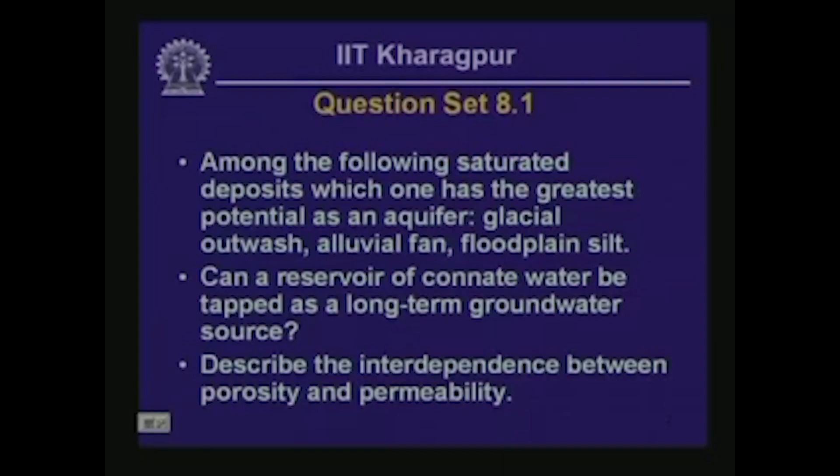Okay, so that takes care of the question set of the previous lesson. Now we move on with today's subject matter. What we want to learn in this lesson: we would like to be able to list the objectives and procedures for groundwater investigation.

We would like to be able to list the factors that influence groundwater flow through soil and rock, estimate permeability for simple subsurface conditions from laboratory and field tests, and finally, we would like to be able to estimate, for very simple subsurface conditions, what is the volume of groundwater flow that is likely to take place.

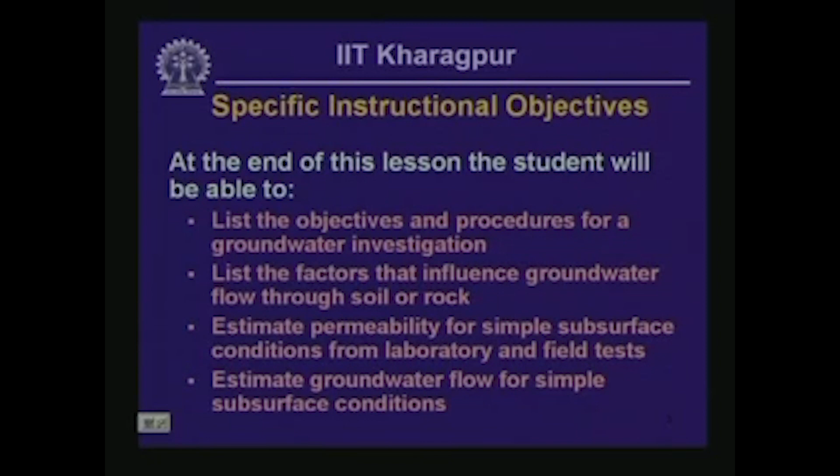First, we look at the typical procedures and objectives for groundwater investigation. In order to assess groundwater potential, the first step is to carry out a groundwater investigation, which should ideally give us some idea about the safe yield of an aquifer. To do that, we need investigation of the subsurface groundwater condition, and we also need some handle on the meteorological aspects or weather pattern prevalent in the particular region of interest.

The second purpose is to identify groundwater related engineering problems. We are going to look later at some of these problems that often need to be handled by engineering geologists.

We also need to identify groundwater chemistry issues, in other words whether the groundwater is suitable for a particular use, such as drinking water, irrigation water, or construction water supply. So we need to identify the potentially harmful chemical constituents in groundwater sources depending on the intended use.

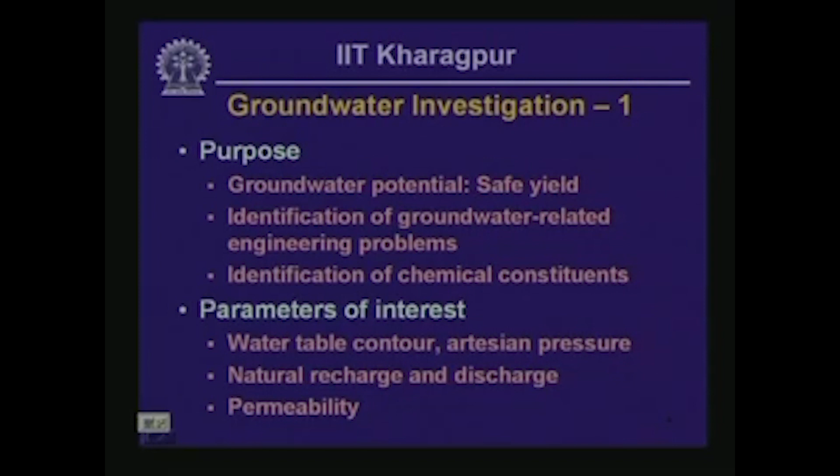Continuing with groundwater investigation, one of the procedures involves groundwater prospecting. What we attempt to do here is identify a source of groundwater. Typically, resistivity survey is a very common procedure for identifying a potential source of groundwater or a zone of saturated soil underneath the ground surface.

We have looked at the main features or essential details of resistivity survey in one of our earlier lessons on subsurface exploration, so I am not going to go into the detail of this particular procedure again.

Another type of investigation carried out is called groundwater survey, which involves installation of monitoring wells, drawing water samples for assessing groundwater chemistry from the monitoring wells, and long term monitoring to assess seasonal fluctuations in groundwater level or artesian pressures within these wells.

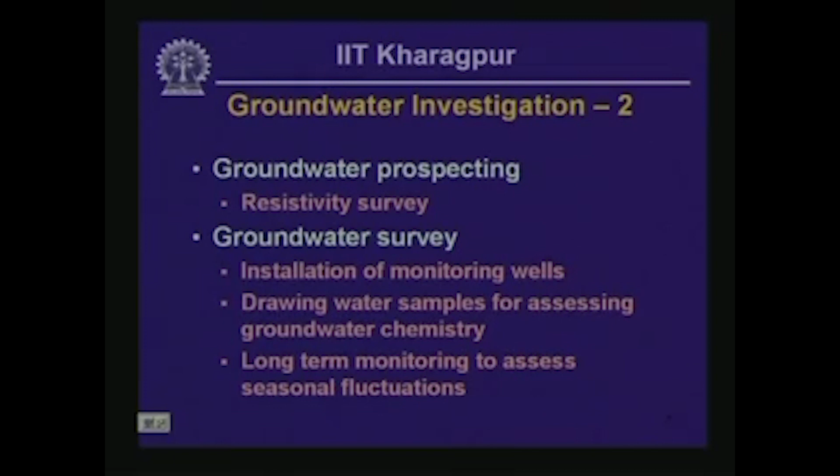What is also done in addition for groundwater survey is to pump out the wells at steady state in order to assess the potential yield from a particular well, and that is called well testing. So all these steps are carried out in groundwater survey and groundwater prospecting.

So you might ask, what is a monitoring well used in groundwater survey? A typical cross section of a monitoring well is shown in this sketch. It is essentially a casing tube installed within a pre-bored hole drilled or excavated within the ground, with the casing shown at the center of the hole, and a backfill around the casing. Let us go from the top.

At the top end of the casing you can see a cap, and there are two vents on the left side of this sketch. These vents are provided to give vent to any gases that might be present in groundwater.

The well casing is protected by installing a protective cover, usually a lockable protective cover, encased within a concrete backfill at the top. This is a concrete encasement in order to hold the protective casing.

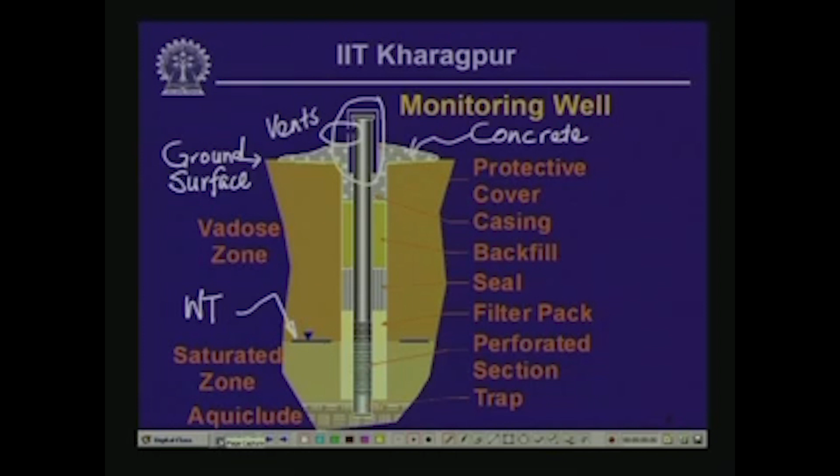What we also have shown here is that the casing tube in this particular case penetrates the entire depth of the saturated zone, and it is encased within an underlying aquiclude near the bottom of the tube there. So that in a nutshell is a very simply constructed monitoring well that is normally used in groundwater survey.

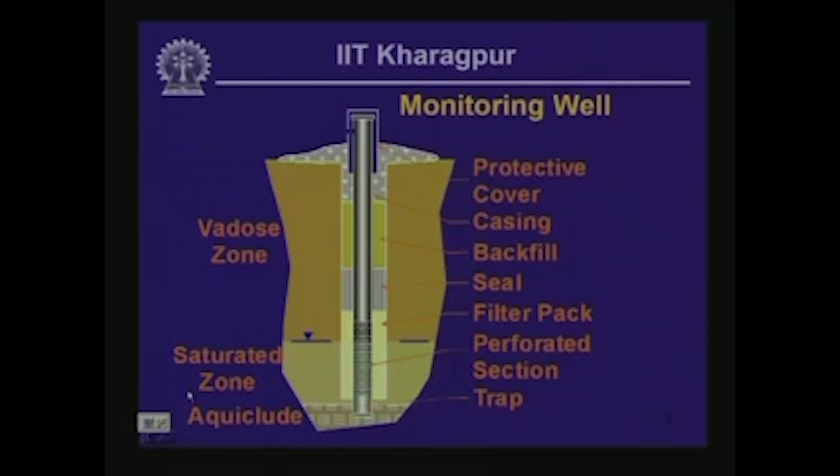So then we would like to know what are the causes or driving factors that trigger groundwater flow. First of all, flow is caused by head loss, and the ratio of head loss to the length of the flow path is called the hydraulic gradient.

Simply stated, what is meant here is that if the water table exists at a higher elevation at some location within the general geographic region you are interested in, in comparison with another location where the groundwater table is at a lower elevation, then usually the groundwater is going to move from the location where the water table is higher to the location where it is lower, because that is how water is going to flow.

We have already stated in the previous lesson that groundwater is that portion of soil moisture which is free flowing, or which can be mobilized by the action of gravity. So it is going to move from a location of higher potential energy to a location of lower potential energy, and the elevation of the water table is a measure of the potential energy of an unconfined aquifer. So water is going to move from a location where the water table is at a greater elevation to a location where it is at a lower elevation.

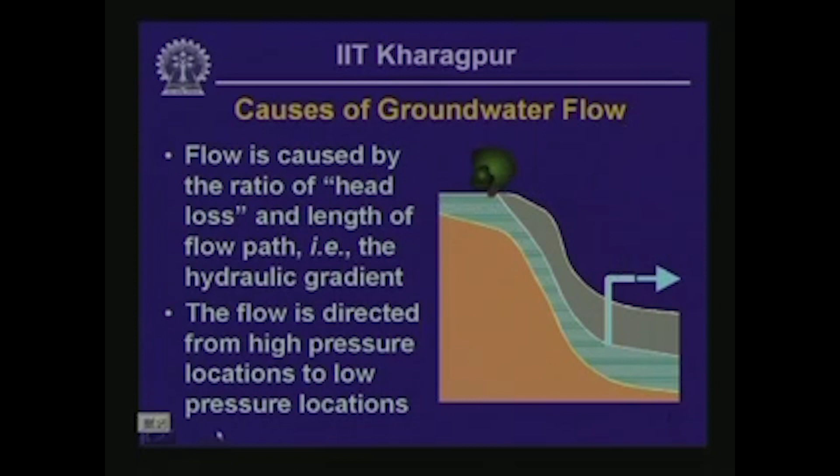The flow is going to take place between the recharge zone, which is towards the top left of this particular sketch, towards the artesian well, and the outflow direction is shown by the thick arrow near the outlet of the artesian well in the sketch. So H and L are explained already.

We have already looked at what is the driving mechanism of groundwater flow. Groundwater flow is driven by the hydraulic gradient essentially. Hydraulic gradient is the ratio of the head loss between the inlet and the outlet divided by the length of the flow path, and that is going to drive the groundwater flow.

Now the question comes, what are the factors that are going to inhibit or discourage the movement of groundwater flow? We know some of these concepts already from the previous lesson. Inhibitors of groundwater flow include, first of all, capillary tension. We need to have relatively large void space in order to get a reasonably good groundwater flow, as we have already discussed.

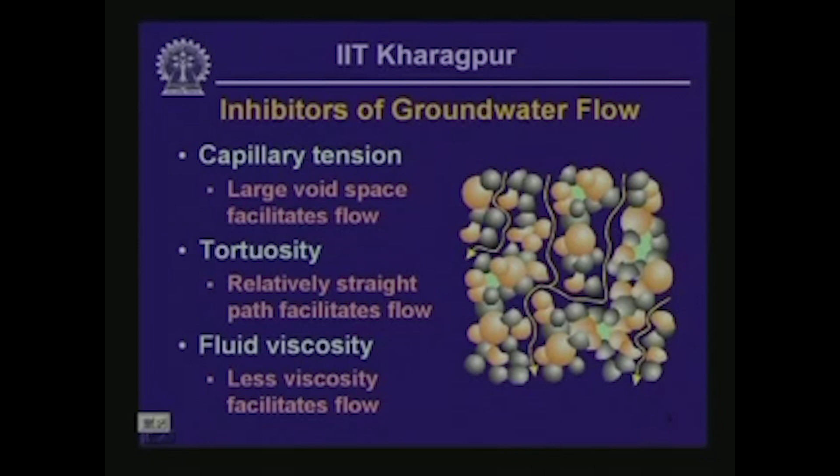The third inhibitor of groundwater flow is fluid viscosity. If you have got less viscous pore fluid, that is going to flow through the interconnected interstitial void space within the subsurface formation relatively easily in comparison with another fluid that has got a much larger viscosity. So these are the factors that inhibit groundwater movement.

Now we need to formalize the concept a little bit. Darcy's law is the law that governs groundwater flow, and what it states is that apparent velocity V is proportional to the hydraulic gradient. In other words, V is equal to a constant of proportionality times the hydraulic gradient, and this constant of proportionality is called the coefficient of permeability or hydraulic conductivity, which is a measure of the factors that inhibit groundwater flow through a subsurface formation.

What we need to stress here is that V, the quantity V, is not the actual velocity, rather it is the apparent velocity, defined as the volume of water flowing through a unit cross sectional area of the aquifer, and that is going to be different from the actual velocity.

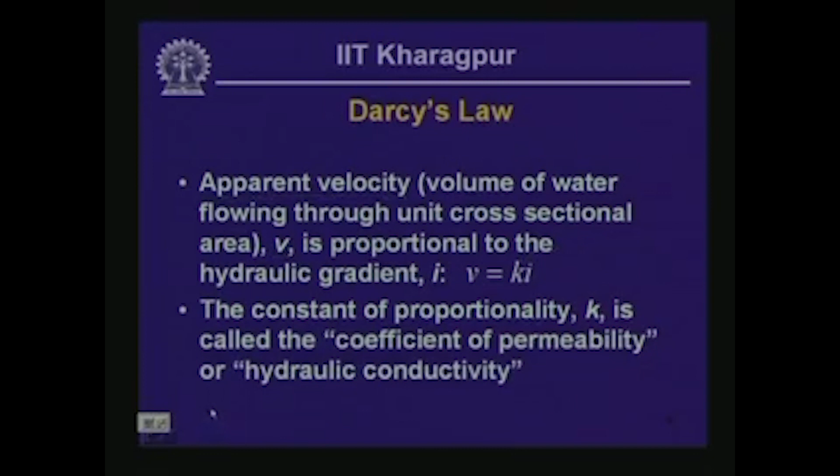Factors affecting permeability. We know some of these things already, as indicated in the previous slide: the constant of proportionality, or the coefficient of permeability, or hydraulic conductivity. We are going to use the term permeability in this lesson, but you need to understand that the coefficient of permeability is in fact interchangeable with hydraulic conductivity.

In the previous lesson we mentioned that permeability is a measure of those factors that inhibit groundwater flow. So what are the factors that inhibit groundwater flow? Those same factors are also going to affect permeability in the long run. So what are those factors?

First of all, grain size is an important factor. We have already seen that if you have a uniformly graded subsurface formation, then you are going to have relatively easy groundwater movement through the formation, so the permeability is going to be relatively high.

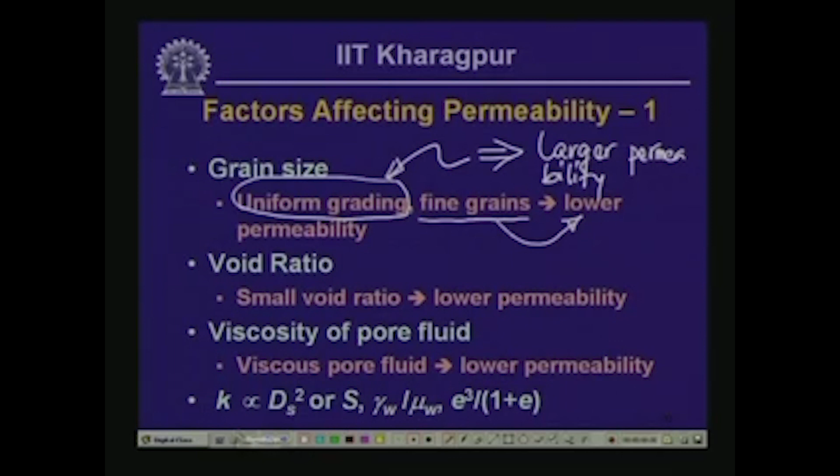Some more factors that affect permeability: saturation ratio is another factor, and permeability decreases remarkably as the formation loses saturation, because the pore space becomes occupied by non-interconnected volumes of water, which are relatively difficult to mobilize through the interstitial void space. As a result, permeability goes down drastically as the formation becomes partially saturated compared with a completely saturated formation of identical characteristics.

Second aspect to consider is the existence of imperfections such as bedding planes, fractures and joint sets. Cross-bedding permeability is usually smaller by almost an order of magnitude in many cases. Fractures and joint sets are more permeable in comparison with the rock between them, and this affects the distribution of permeability. Both these aspects lead to the development of anisotropic permeability behavior - anisotropy.

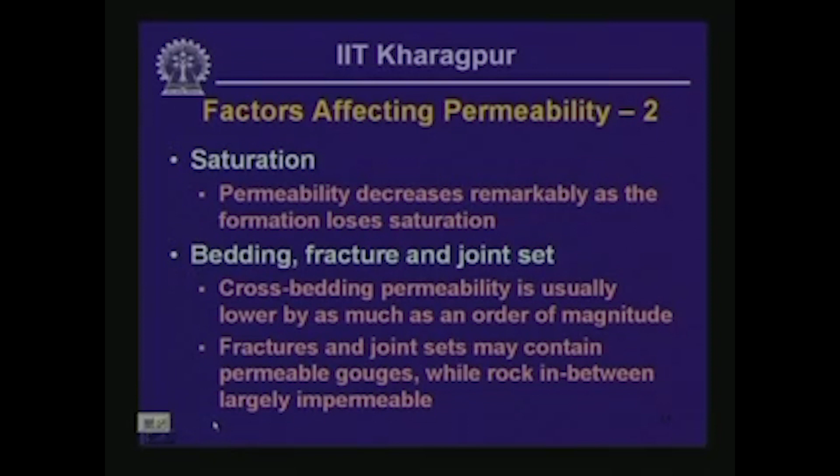You also need to consider time dependent changes in permeability. In Darcy's law, permeability was treated as a constant. Recall that V, the apparent velocity, is given by permeability times the hydraulic gradient, and we considered K a constant in that case, but in fact K might actually change with time because of several different reasons, mechanical or chemical, as we are going to see next.

What could happen with time over which groundwater flows through a particular aquifer? Clogging may take place, or opening of pore spaces may take place. These are two opposite effects. If pore spaces get clogged because of migration of solids or chemical precipitation, permeability decreases over time. On the other hand, if pore space becomes larger, permeability increases over time, and this can also happen in case of hydrofracturing.

We looked at the details of hydrofracturing briefly some time back in one of the earlier lessons regarding in situ stress within a subsurface formation. So if hydrofracturing gets triggered within a formation, permeability is going to increase for that particular formation.

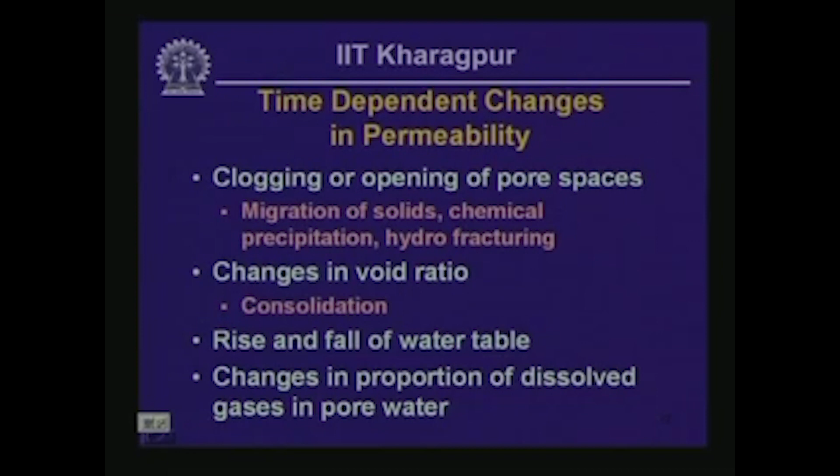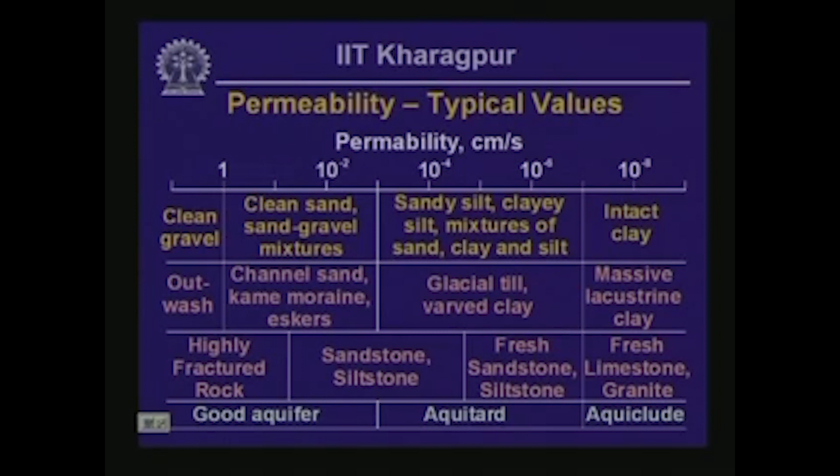It is called the constant head laboratory permeability test. A soil or rock sample is placed under constant head difference. At the bottom end of the cylindrical sample, you have a lower head elevation, lower groundwater pressure corresponding to the tailwater elevation. At the other end of the sample, we have a much higher elevation, and the difference between these elevations triggers groundwater flow, and that difference is H.

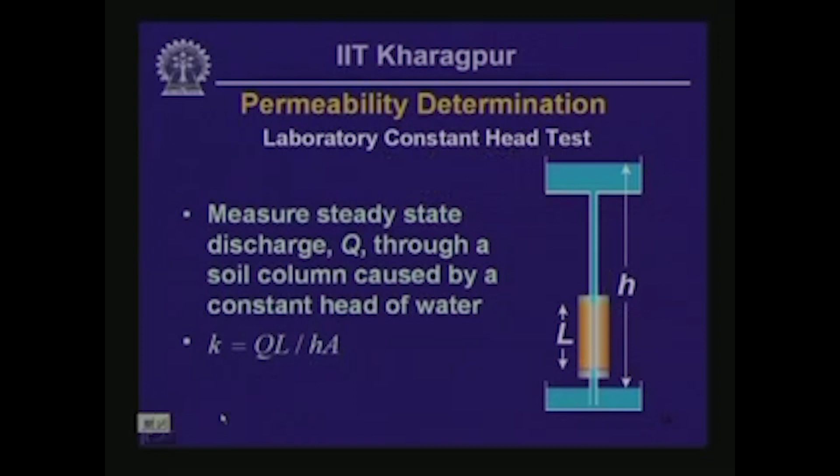Now let us look at the animation of the experimental procedure. First we place the cylindrical specimen in that particular configuration shown on the right, and then we let the water table drop to a smaller elevation.

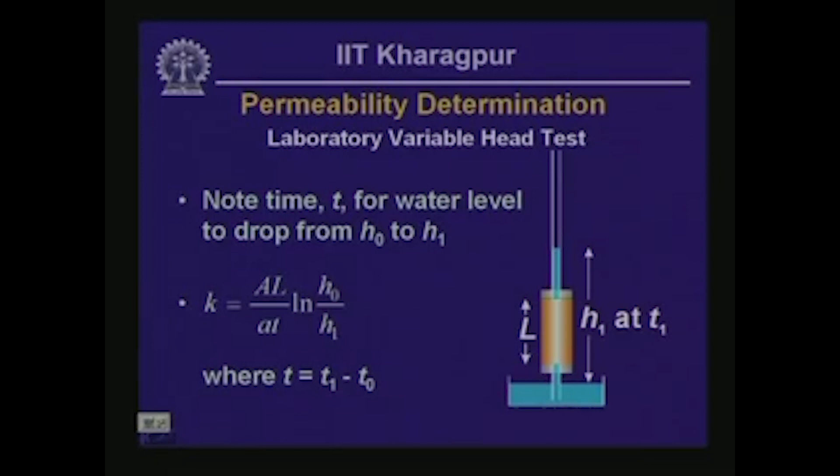We find the time difference between these two elevations, between the time difference between when the water within the standpipe at the top end of the cylinder was at H naught and that at the height of water of H1, and from these data we can calculate the permeability using the expression given on the bottom left of this slide.

Laboratory methods are not representative in many cases of the general nature of a large mass of aquifer that might be encountered in the field. So many engineering geologists prefer field variable head tests as opposed to laboratory tests.

Here, what we first do is bail out the water from within the casing tube, so that the elevation of the water level within the tube goes down to a depth of H naught below the existing water table, and then the water table is allowed to rise to another depth.

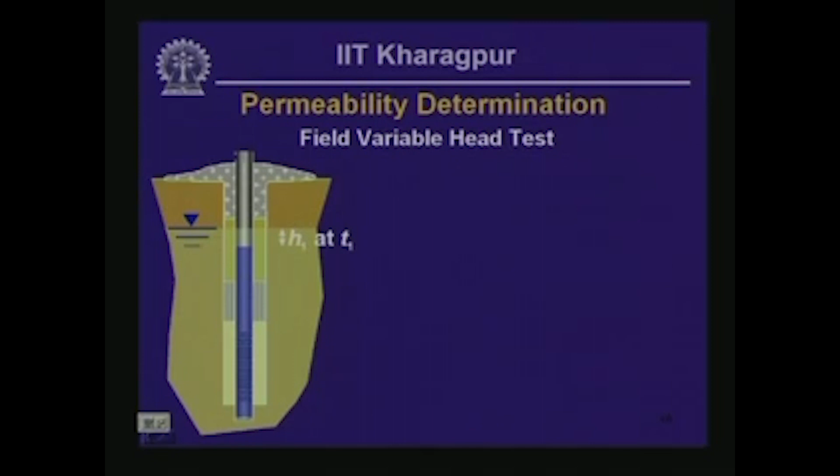Now, this particular equation represents an aquifer which is unconfined and extends to a great depth below the water table.

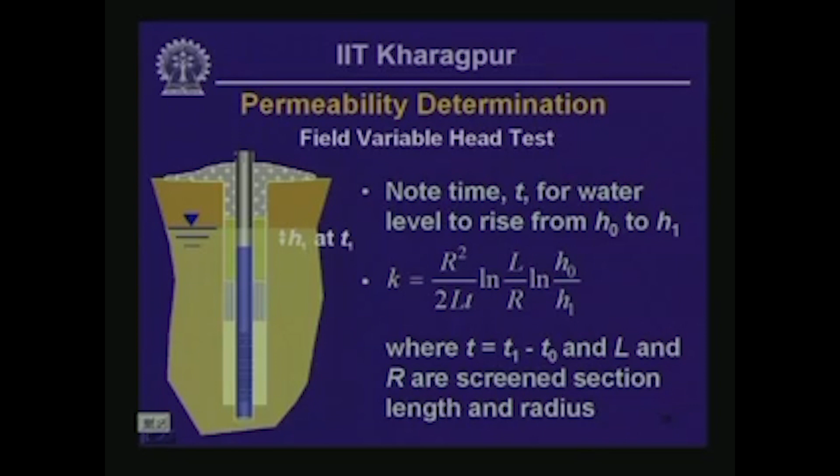What you should try to find from this configuration is the amount of water that is going to flow into the drain, or in other words, how much flow the interceptor drain needs to be designed for.

Now you try to answer this particular question in your leisure time, and we are going to look at this calculation when we meet for the next presentation next time around.

We are going to continue our discussion on groundwater flow in this lesson as well, and we are going to begin with the example or question or problem that I asked near the end of the last lesson. We are going to try to find out the solution for this one.

Now, this was the problem here, that we have got a road cut basically which intercepts an unconfined aquifer within a sandstone bedrock. The underlying intact granite is relatively impervious.

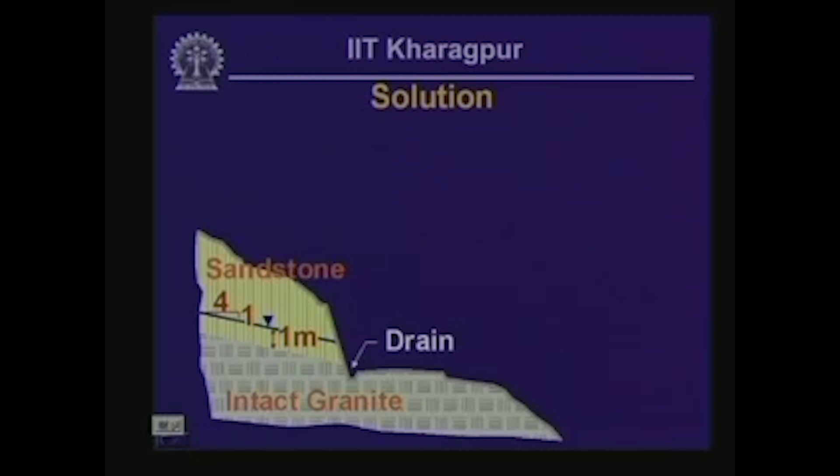So the question that I asked was how much flow will be intercepted by the drain that runs parallel along the left edge of the highway shown on the cross section in the sketch there. And the statement of the problem was like this.

The permeability of the sandstone aquifer was 10 to the minus 4 centimeter per second, and what I asked was for you to find the design discharge for the interceptor drain. Okay, now let's get on with the solution first.

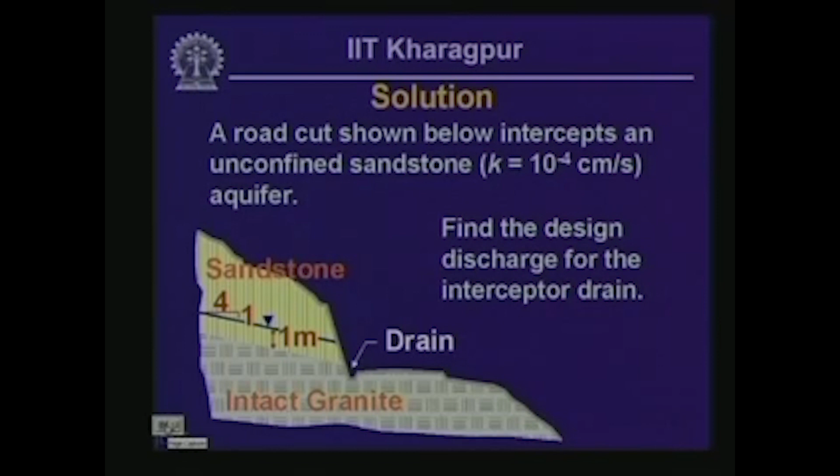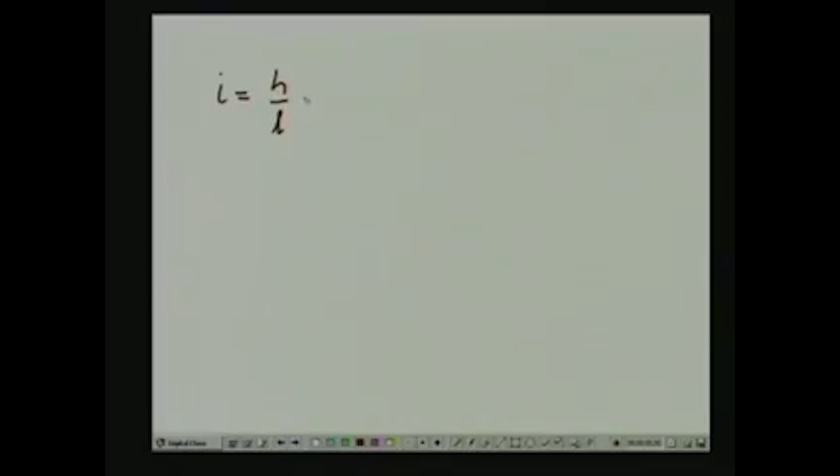In this particular configuration, what we have is the hydraulic gradient is equal to the amount of head loss over the length of flow, and this will be the same in this case as the slope of the top of the water table. So in this particular case it is going to be 1/4.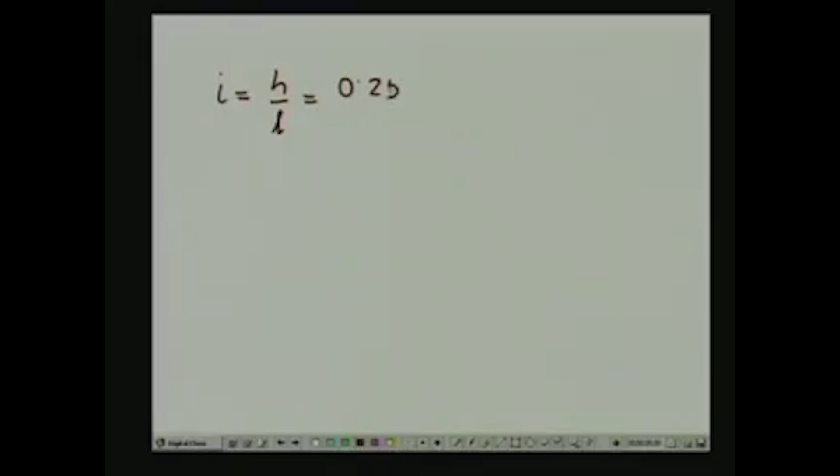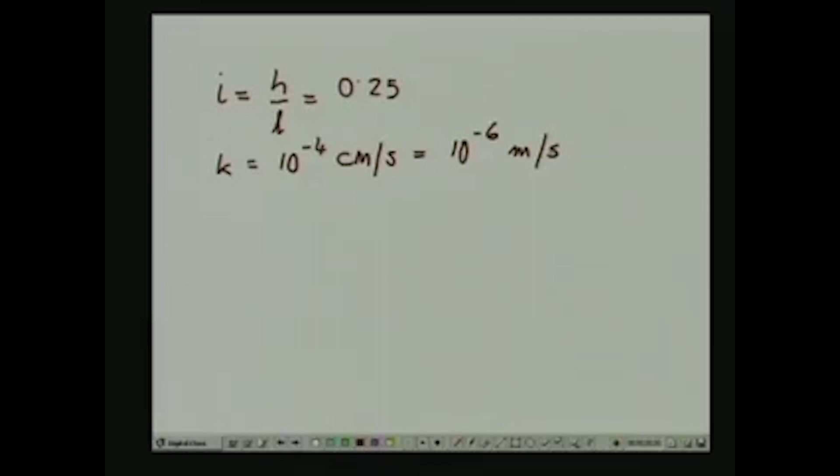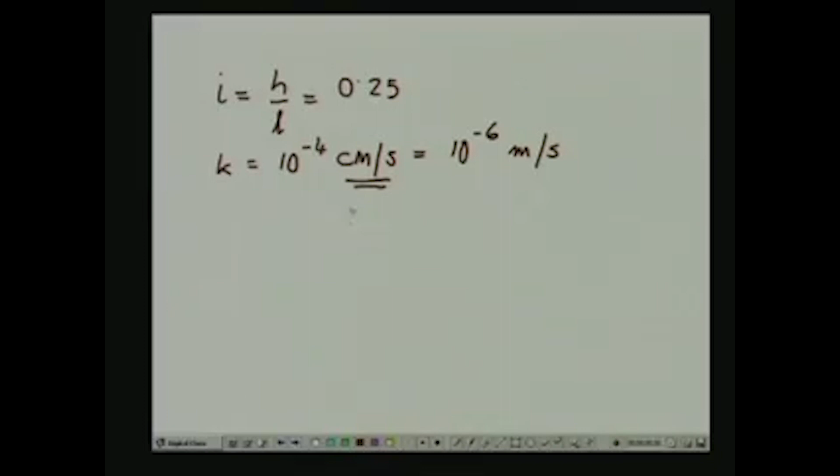What we also have is the permeability is equal to 10 to the power minus 4 centimeter per second, which is in turn going to be equal to 10 to the power minus 6 meter per second. I should draw your attention to my usage of centimeter per second as the unit of permeability, although we are in general sticking to SI units in this series of lessons.